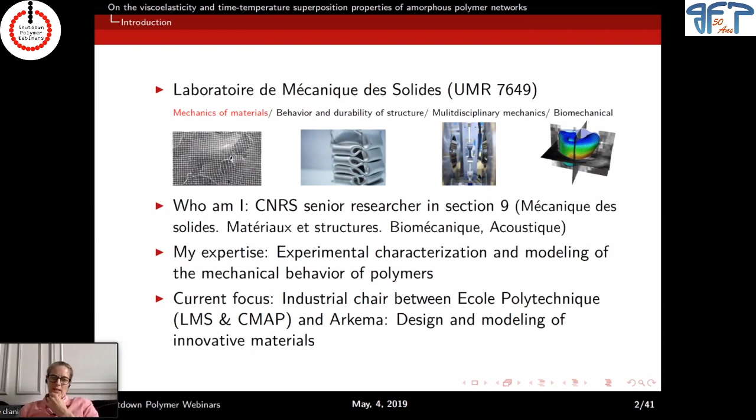I'm going to talk about a topic that we studied with my colleagues for approximately a decade. But my current focus is on an industrial chair between École Polytechnique, so our lab, and CMAP, the Applied Mathematics Department lab, and Arkema, and we are interested in design and modeling of innovative materials. I'm leading this chair for École Polytechnique.

So when we started looking at linear viscoelasticity and time temperature superposition of polymers, we were interested in modeling the shape memory behavior of polymers, more precisely of amorphous networks. We thought this property would probably be linked between the viscoelasticity and the time temperature superposition. So we looked at that, and we looked into the characterization at small strain, infinitesimal strain. Then we looked at how that extends to finite strain.

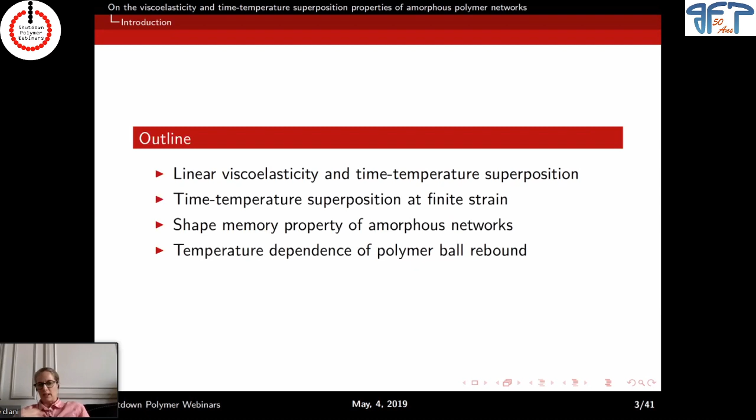And once we've characterized that, we look at how this helps predict the shape memory property of amorphous networks, and can also be useful for other applications like the rebound of polymer balls, like bouncing balls.

Okay, linear viscoelasticity. As I said, we are interested in writing constitutive equations. Basically, this defines the relationship between stress and strain and other internal variables, which can be, for example, plastic deformation, viscoelastic deformation, damage. Here we're going to focus on isotropic materials, basically materials with the same response with no privileged direction.

So the same response, whatever the direction of loading. And those materials can be completely described by two moduli. For example, shear and bulk moduli, but it can be also Young's modulus and Poisson ratio, or Lamé constants.

And viscoelasticity is basically a time-dependent behavior. So the stress is not only dependent on the state of strain, but it's dependent on how you reach this state of strain. The whole history of loading is going to affect the stress at time t, okay?

And in linear viscoelasticity, that means you can define the stress-strain relationship as such, with G of time, the relaxation modulus. And the goal is to define this function.

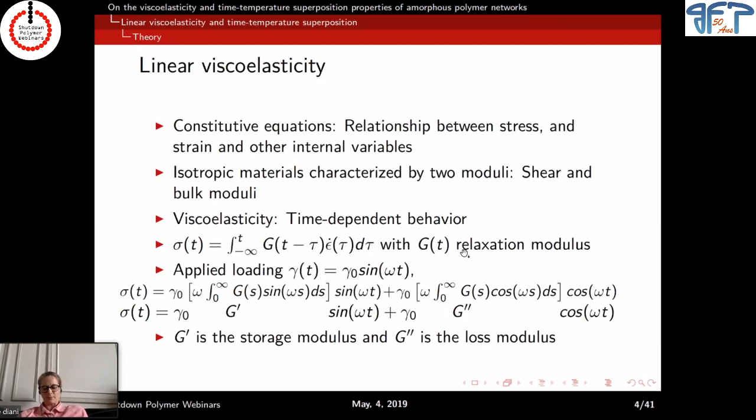Okay, from an experimental point of view, if you apply a sinusoidal shear, for example, if the material behaves as linear, what you get in terms of stress is a sinusoidal response, like here. And so if you plot the stress as a function of strain, you'll get a nice ellipse.

G prime and G double prime are calculated using fast Fourier transform, but you can also define G prime very simply: it's stress when the strain is maximum over the maximum strain. G double prime is related to the energy loss during a full cycle, so the hysteresis on this ellipse.

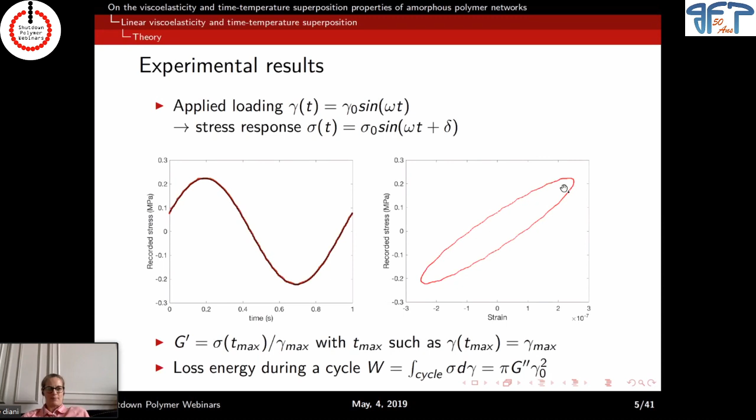When you're dealing with nonlinear response of a polymer network, you apply the sinusoidal strain and you won't get a sinusoidal response, such as here for a rubber material at large strain. If you plot stress in terms of strain, since I'm in a rubbery state here, I don't have hysteresis, but I don't have an ellipse either.

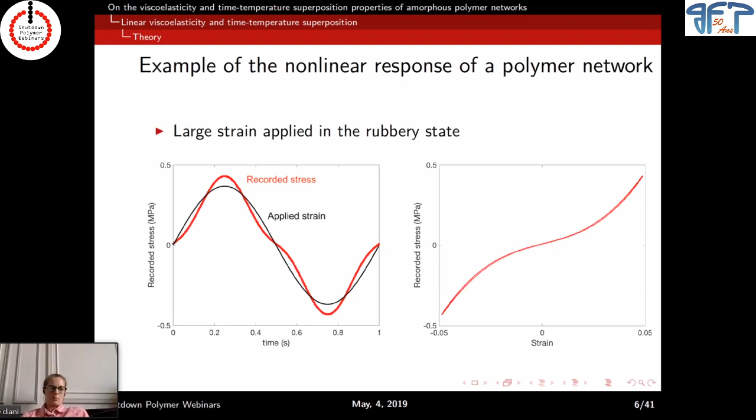Okay, so for the moment, I'm just interested in linear response. So I apply a sinusoidal strain, and I get a sinusoidal stress.

The polymerization and the cross-linking happen at the same time, so we don't really control what we get, but what's nice is that in terms of mechanical properties, we are capable of making simple materials that are reproducible.

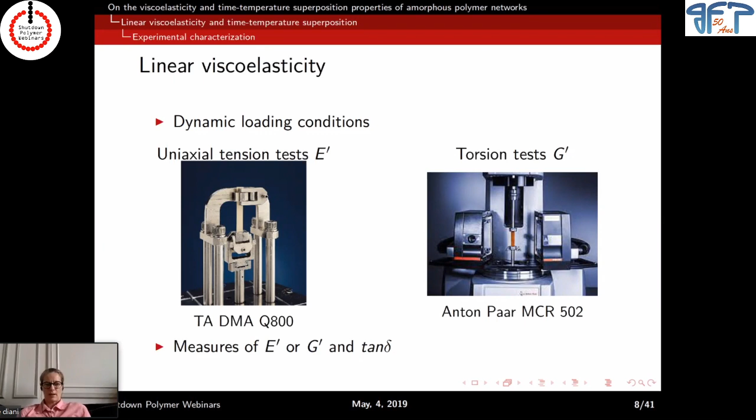Okay, so the first question I asked myself, because I was at the time at the PIMM, we had two types of machine helping characterize the linear viscoelasticity. So the first question was, if I apply uniaxial tension DMA or torsion DMA, would I get the same result? I had access to a TA DMA Q800 and a rheometer from Anton Paar to apply torsion and get access to G prime and G double prime. So first for the uniaxial tension test.

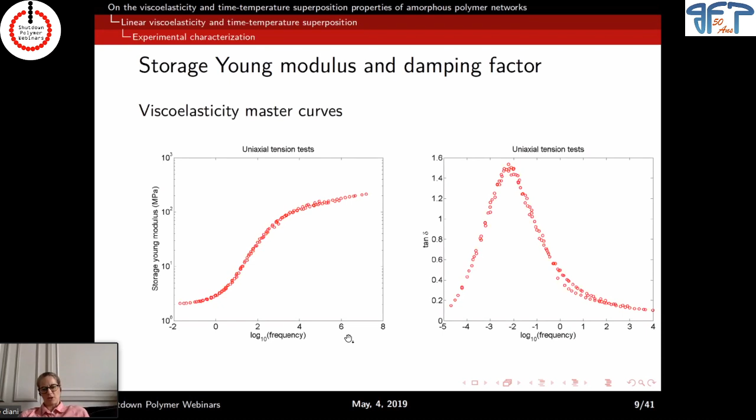The idea is that we want to build the viscoelastic master curve. Obviously, it's impossible to apply such a range of frequency, so we apply frequency sweeps from 10⁻² to 10 Hertz at given temperatures, for the same small amplitude, small enough so we have a linear response of the material. We get storage modulus as a function of frequency in log scale, and tangent delta in terms of the log of frequency.

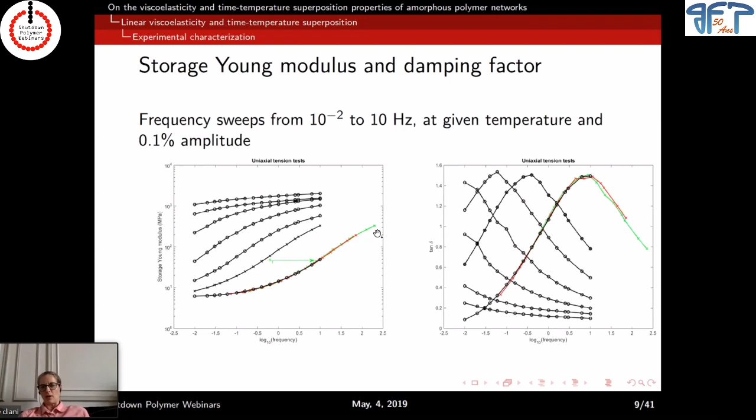We're going to build the master curve by applying the time temperature superposition. Choosing a reference temperature, the higher temperature, we're going to shift the curves one by one, and that's going to give us access to the shift factor for the reference temperature, and we're going to be able to build the master curve like that.

Okay, so that's classic, and that gives us access to some shift factors and the material's viscoelasticity. If I look at torsion test, it's a little bit more complex.

First, we're dealing here with solid rectangular samples, and we notice that if we have different geometries - here length 46mm and 5 millimeter width, so something a bit more slender than another more rectangular sample - and we do a temperature sweep, we get a very different response, even though we had a temperature sweep of 1 degree per minute.

Which is quite a small temperature ramp. So we noticed that according to the sample geometry - the thickness of the sample was 1 millimeter - we get different responses. So those temperature sweeps are nice to get a quick qualitative idea of the result, but will never give you quantitative data to characterize the viscoelasticity.

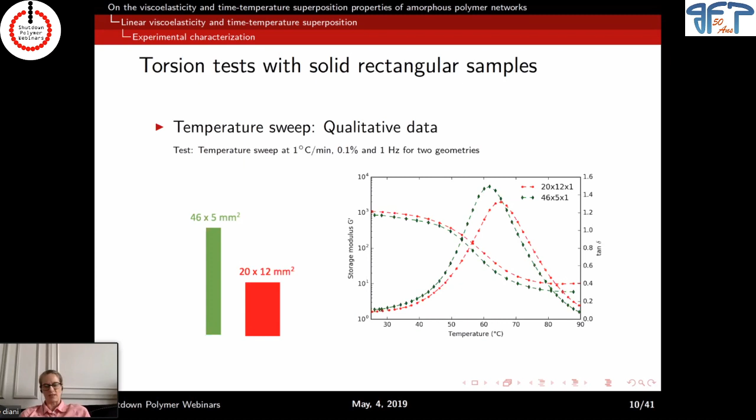If we do frequency sweeps, measuring at different temperatures but equilibrating the temperature before doing the measurements, we get the same tangent delta, but we don't get the same storage modulus. Why? Because actually, to get G prime and G double prime for a rectangular sample in torsion, we use the Saint-Venant approximation, and when you do that, you assume your sample is long with no disturbance from the grips that constrain the lateral displacement of your sample.

So we did finite element simulations to understand this difference, and actually you can see that the grip prevents homogeneous deformation in the smaller sample. So if you want a good quantitative result, even during a frequency sweep with this test, you need slender specimens - as long as you can and as thin as you can. But obviously, the small thermal chamber can be problematic from time to time.

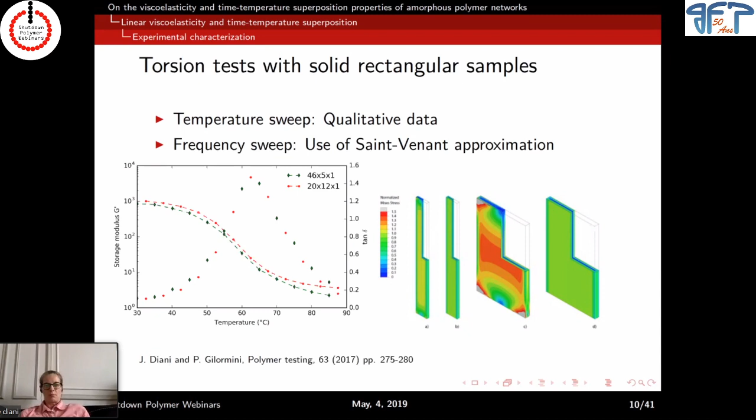Okay, so now that we know that, we're careful, and so we use long, thin samples. And we did the frequency sweeps from 10⁻² to 10 Hertz, at a given temperature, small amplitude of strain.

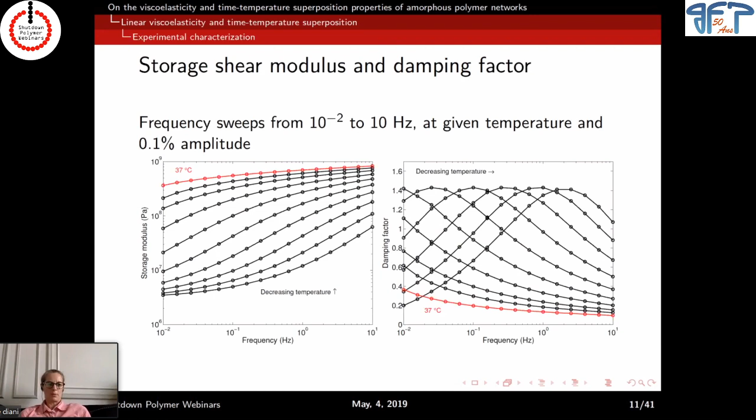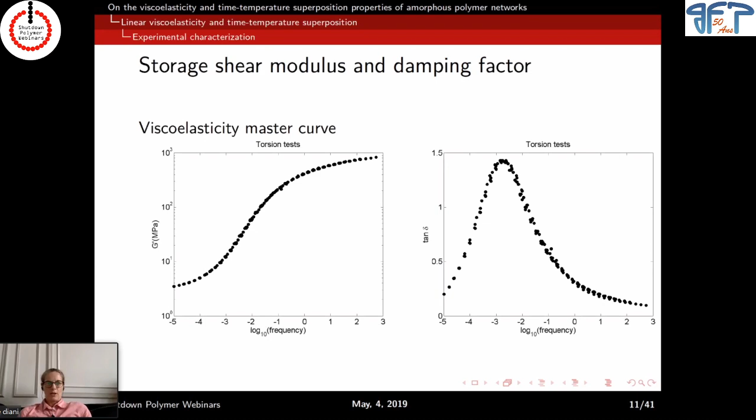And we build the master curve for G prime and tangent delta, as we did for E prime and tangent delta. So first thing, if we look at the shift factor for both tests, we can see that for building the master curve at the same reference temperature, we have equivalent shift factors.

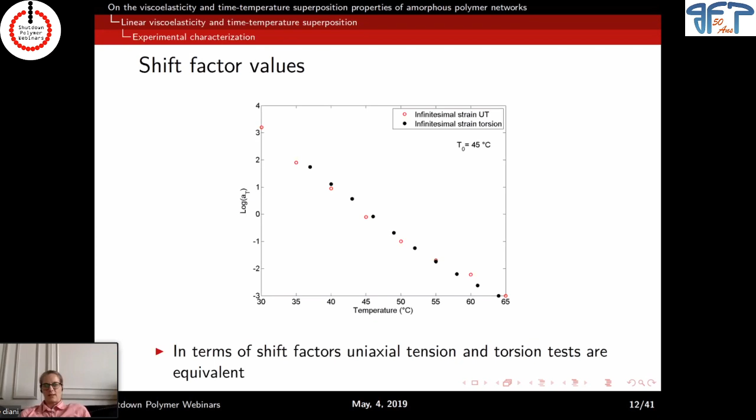So both tests give us the same shift factors. If we want to compare G prime and G double prime for both tests, we can use Hashin correspondence principle, which basically says that all the relationships that exist in elasticity still apply in linear viscoelasticity if you replace the elastic values by their complex values.

These are defined as, for example, G star is going to be G prime plus i G double prime. So doing that, we can use the value of E star that we measured.

We need to make an assumption for the bulk modulus because there are very few apparatus that give you access to the viscoelasticity of the bulk modulus. We thought, okay, we're going to assume it as elastic because, although it changes over temperature so it's viscoelastic, the order of magnitude is 2 to 3, while Young's modulus or shear modulus change over 3 orders of magnitude. So we assume it constant and calculate G prime and G double prime with the measured value obtained in uniaxial tension, and compare it to the G prime and G double prime measured during torsion test.

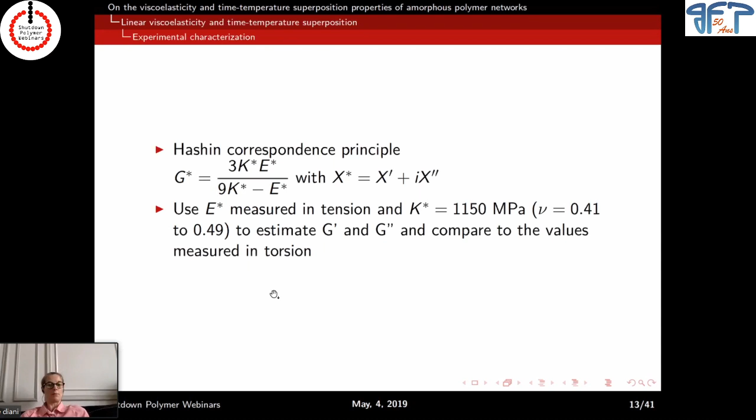When we do that, we can see that we have very nice superposition. So what does it mean? That means those tests are completely equivalent. You can characterize the linear viscoelasticity in uniaxial tension or in torsion or shearing.

And if you wanted to have access, for example, to the Poisson ratio or bulk modulus viscoelasticity by running both experiments, your experiments are not sensitive enough to do that. So you won't have access to the viscoelasticity of incompressibility.

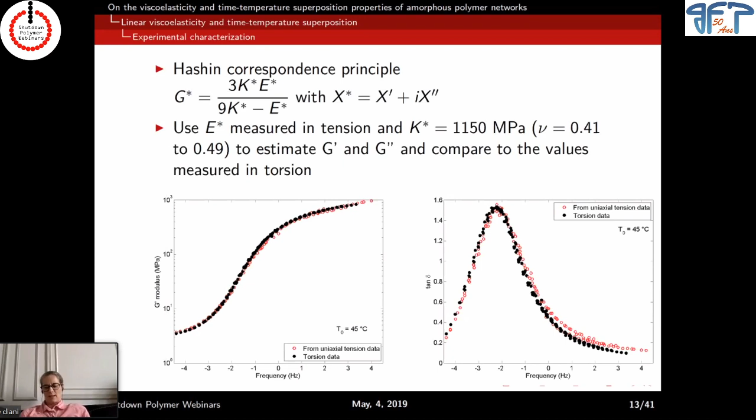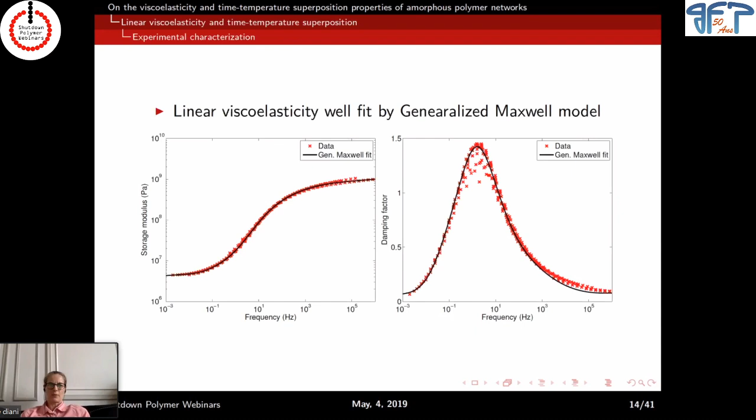Okay, so now that we know how to characterize well the linear viscoelasticity of our material, we can fit it by a simple model, generalized Maxwell model, that works really well for polymers in general. And here it's fit with 20 relaxation times. So this model is basically Maxwell elements in parallel, with a spring for the long-term elasticity, because we have a network here, so our polymer doesn't flow.

And the relaxation function, relaxation shear modulus, is defined like that, with GE being your elasticity at long term, and GI and tau i, a number of couples depending on the number of Maxwell branches you want to take into account.

Usually for polymers, amorphous networks, about 20 is fine, but if you have copolymers, sometimes you need like 40. It can be much more. It's not a problem since you have a sum, it's not really costly.

So basically, we measured G prime and G double prime as a function of the angular frequency, and so we are able to calculate GI and tau i. But it's an ill-posed problem, though there are ways in the literature to solve that correctly, as you've just seen.

And so once you have this function, you can calculate the stress response of your material for any loading history at the given temperature, your reference temperature where you build your master curve. And then with the shift factor, you have access to the linear viscoelastic behavior at any temperature.

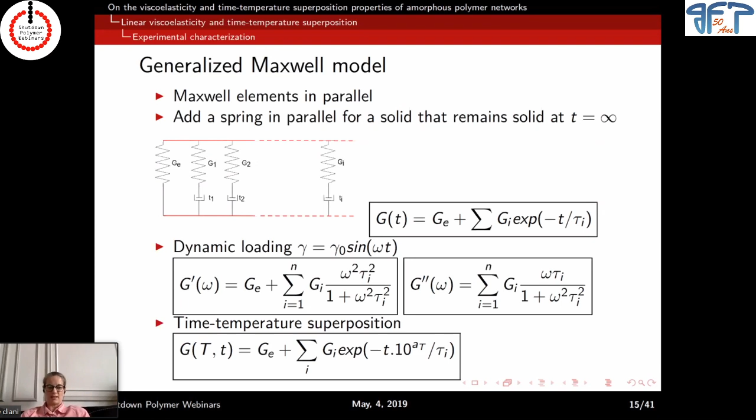So now, since we want to deal with shape memory properties, it's not only small infinitesimal strain, sometimes we have large transformation or large deformation. We wondered, okay, all those shift factors that are very useful for us because they make the link between temperature and time, do they apply for finite strain?

If it does apply, what we should get is being able to define the reduced time for any temperature, making the link between the reduced time at a given temperature T0, and the time at any temperature. So basically, if you apply a stress strain at a given strain rate epsilon dot at temperature T, you should have the same response as the material at temperature T0 solicited at the strain rate depending on T0.

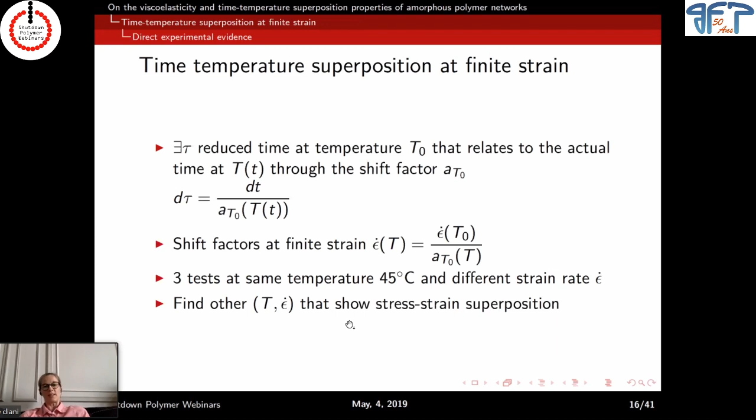So to try that, we set 3 uniaxial tension tests at large strain, temperature 45 degrees, and different strain rates. We measured the response and tried to find other couples of temperature and strain rate that show the same stress strain response, so superimposition between the stress strain responses.

So now that we observe time temperature superposition at finite strain, we compared the shift factor measured with the linear DMA test, and the shift factor measured at finite strain with the stress strain response in uniaxial tension. And as you can see, they are completely equivalent.

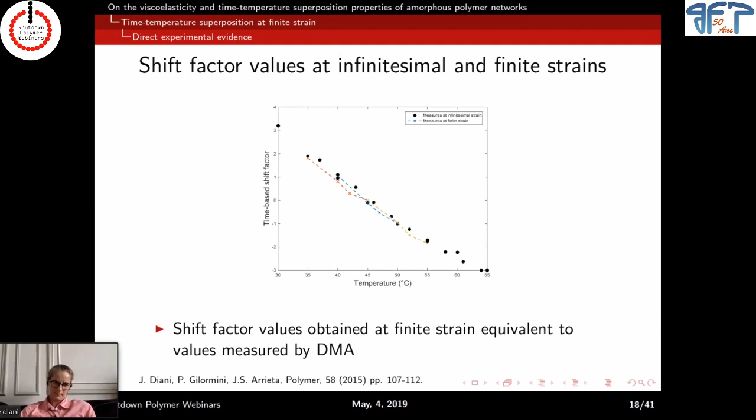Okay, so what's nice now is that I can define simply a constitutive equation at finite strain. So visco-hyperelastic behavior.

We have measured in linear viscoelasticity the time temperature shift factor for the time temperature superposition, and we have measured the viscoelasticity in terms of the relaxation time and the modulus associated to that. We can transpose that directly to large deformation using either a Simo model or a thermodynamic model, such as proposed by Reese and Govindjee.

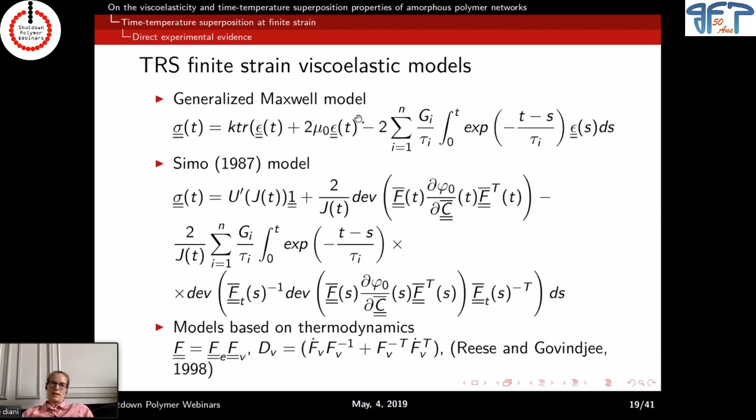So I won't go through all these equations, but it's basically writing the generalized Maxwell model in finite strain. Okay, and we're going to apply that to the shape memory property of our amorphous network.

And so the property, the shape memory property for amorphous network, is very simple. You go at high temperature, you're in the rubbery state. In the rubbery state, you can apply large deformations that are reversible.

So by maintaining the shape and cooling down the material, the material is in the glassy state, the chain mobility is very low, and so the material will keep its shape as long as we don't expose it to high temperature. If we put it at high temperature, it's going to recover the initial shape.

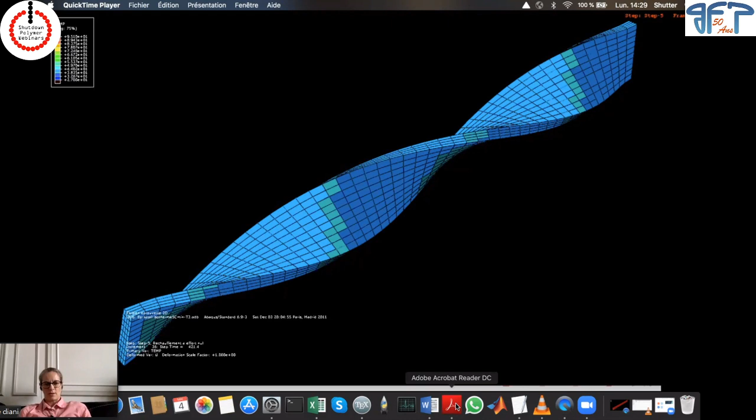So that's the principle. Basically, you need to have elasticity at high temperature, being able to apply large deformations that are recoverable. You apply at high temperature the temporary shape, cool it down while maintaining the shape. When you release the stress, the shape remains, and then just by heating, you'll recover your initial shape.

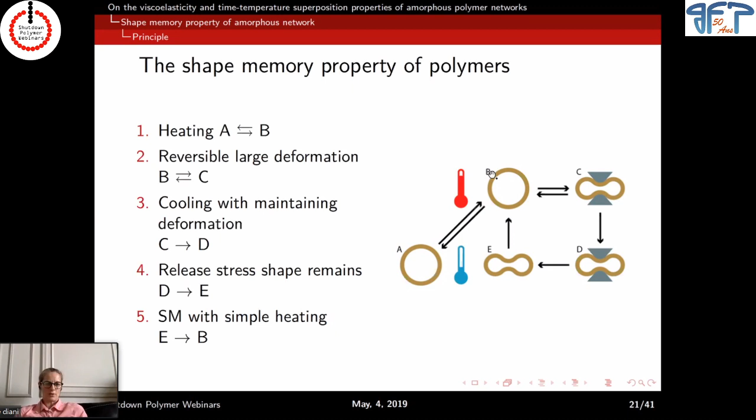When we started working on that, in the literature there were basically two types of tests, uniaxial tension tests, which are nice for one reason, that you can apply large deformation, but also because you can look at the shape recovery, looking at, while you're raising the temperature, how it recovers the strain.

But also what you can do is look at this, what we call abusively stress recovery, basically you maintain the applied strain and raise the temperature and look at how the stress evolves with the temperature.

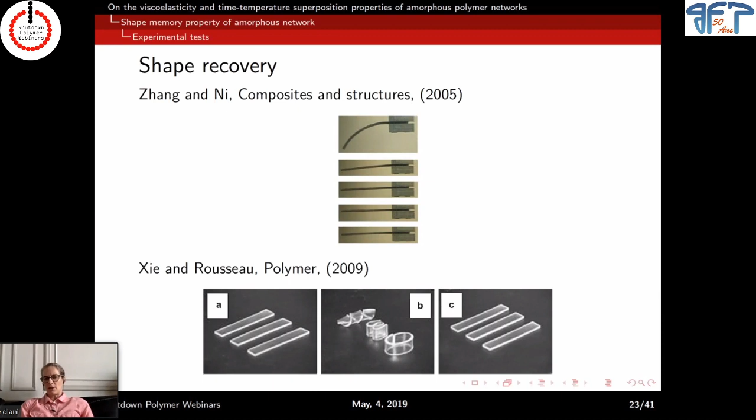And there was change of shape, but that just looks at whether we have a complete recovery or not. So no quantitative following of the shape recovery. That doesn't help you look at the kinetics of the recovery and how you can predict that.

So we decided to build a device, a torsion device, that would help us look at change of shape with large transformation, rather small deformation, but large transformation.

And quantitatively, while we raise the temperature, look at the recovery in terms of temperature. So the idea was to have a slender rectangular sample, raise the temperature, apply a 360-degree torsion, cool it down, and then look at its recovery while heating the sample.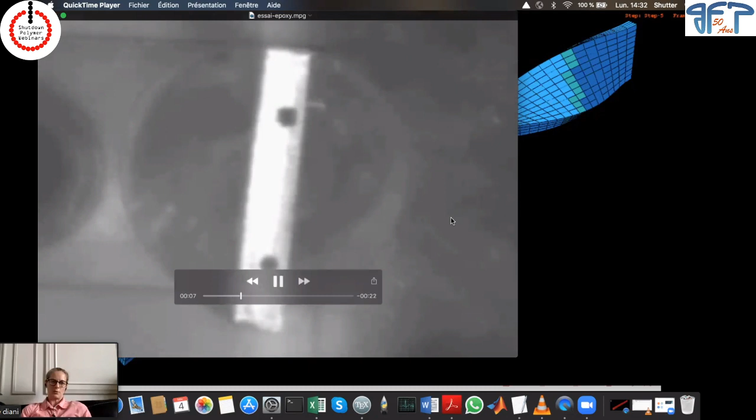...look at, while we were measuring the temperature change over time, the recovery of the sample in terms of angle of recovery with the temperature.

Okay, so the torsion: we heated the sample above the glass transition, applied a 360-degree torsion at high temperature, cooled it down, looked at the shape fixity, meaning how much the material recovered after we release the stress at low temperature, and it was excellent because applying 360 degrees, we ended up with 359 degrees of rotation.

And then we record the torsion angle recovery, and the temperature history while heating the sample.

So that gave us not only good recovery or bad recovery, but the kinetics of the recovery. Here you see the recovery according to the ramp of temperature heating from 1.1 to 5 to 6 degrees per minute. You can see how the recovery is complete, but also you can see the kinetic impact of the temperature rate.

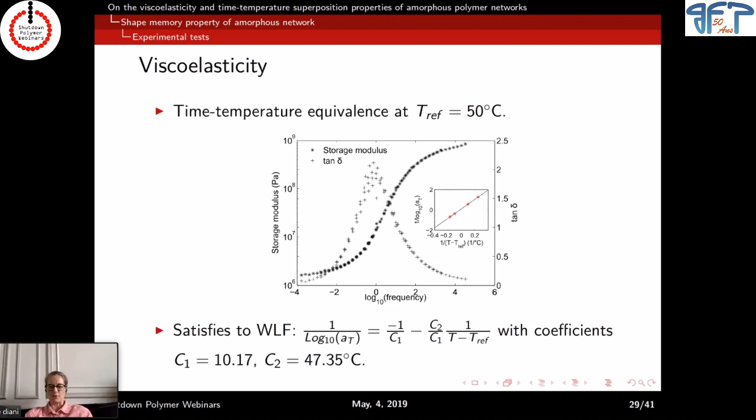With the viscoelastic measurements, we fit a generalized Maxwell model on G prime, validated it on tangent delta, and looked at the viscoelastic spectrum.

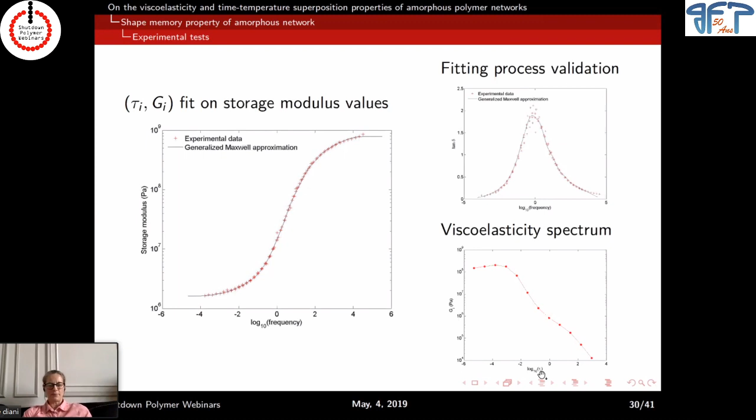The GI is a function of the relaxation time. We needed additional data because we do 3D simulation, so we needed a bulk modulus, and we gave a value that was reasonable to get something that was okay in the glassy state and in the rubbery state.

Also, in torsion we don't need it that much, but later in uniaxial tension we'll need a linear thermal expansion coefficient.

We had two approaches. First, we measured in the glassy state and in the rubbery state. But then if we had to do the whole history and have good stress in uniaxial tension, we needed to measure it and give the whole history as a function of the temperature rate, because the linear expansion is also depending on the temperature rate.

The modeling was done with the finite element code Abaqus, using the NLGEOM option for large deformation. The generalized Maxwell model and the WLF equations are available in the code for finite strain.

The reference elastic behavior, the hyperelastic behavior at high temperature, was chosen as Neo-Hookean with elastic modulus of 1.6, which we measured experimentally.

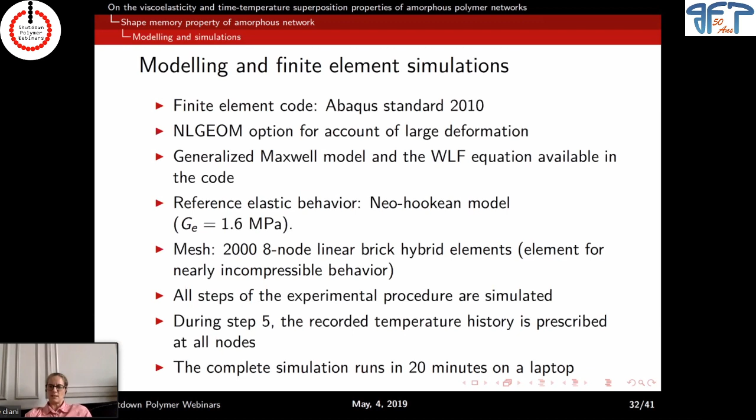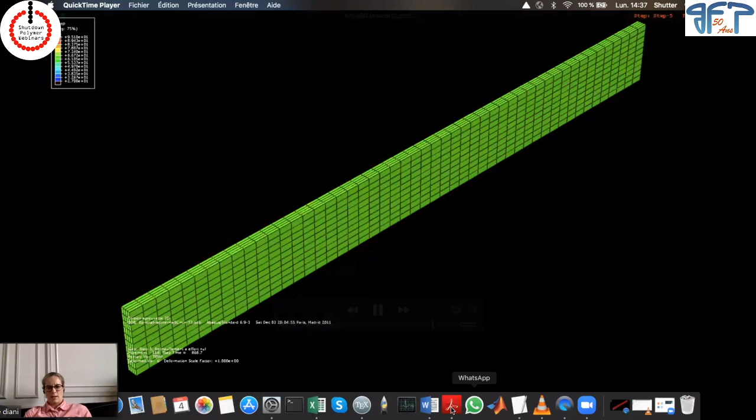That gives something like that. Look at our sample. We have, according to the temperature, how the material recovers.

If we compare the model and the experiments, you can see that we can predict the kinetics of the shape recovery. Basically, what we just proved is something that probably a lot of people from the physics of polymers would say is obvious: that the shape memory property of amorphous polymer networks is basically a signature of intrinsic properties of this material, which are the viscoelasticity and the time temperature superposition, and nothing else. It's one thing to understand it, another thing to prove it, and to be able to give constitutive equations that would help predict the behavior of this material.

We also looked at a large strain uniaxial tension test, because it gave us a little bit more versatility. We could look at large strains of 20 and 50%, and we could look at the temperature at which we applied the strain.

65 degrees was basically for us the rubbery state, 45 was the beginning of the onset of viscoelasticity. We looked at the impact of the heating ramp.

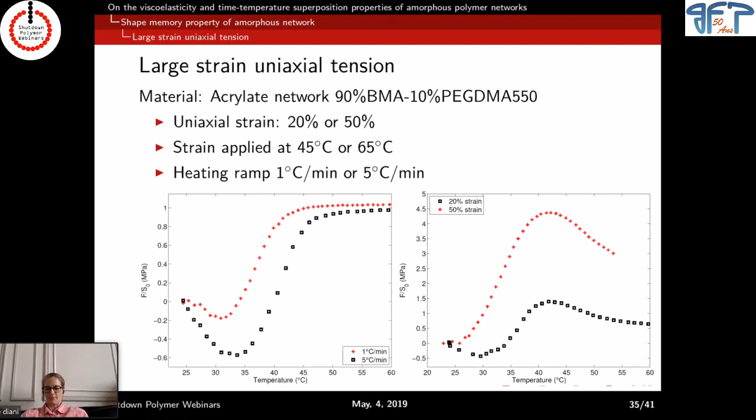With the same model, you can see that we have a very good prediction of the shape recovery, whatever the temperature rate, whatever the applied maximum strain.

We were also able to show that we get very good stress recovery, so the constitutive equations are robust enough not only to look at how the shape recovers, but also how the force evolves with temperature.

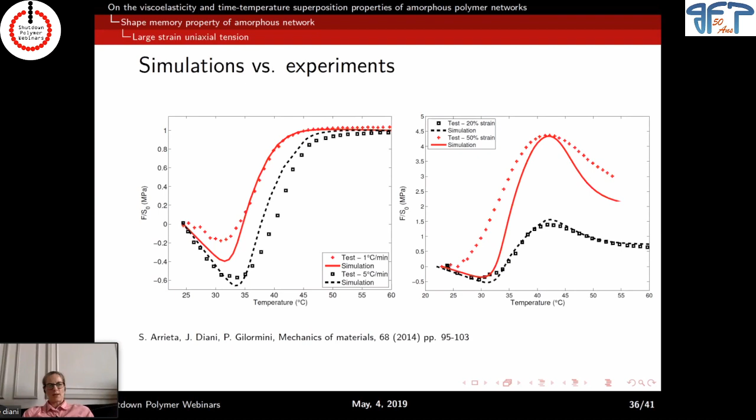After that, we thought about what else could we do exhibiting the linear viscoelasticity properties and the time temperature superposition in an amorphous network. We had a master's student who came to see us in first year, and we decided to go for a fun project: let's make some rubber-like polymer balls.

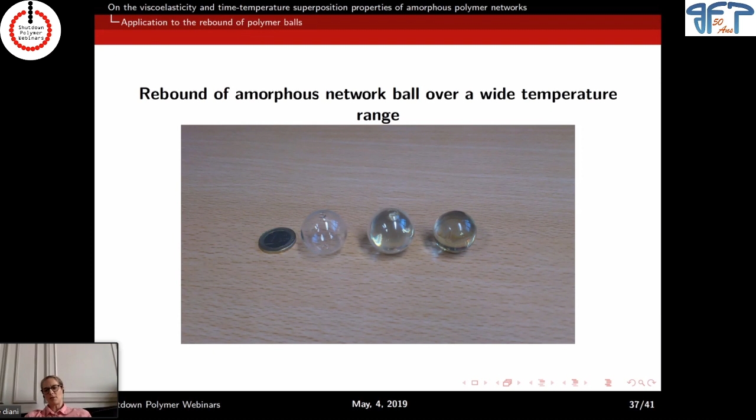We look at the rebound of these balls according to the temperature. Here is the experiment that the student ran at different temperatures. We're going to look at the rebound of the polymer ball. For curing our balls, we had a pump to drop the ball straight onto a granite slab, and we put a piezo resistive capture to record the duration of impact on the slab.

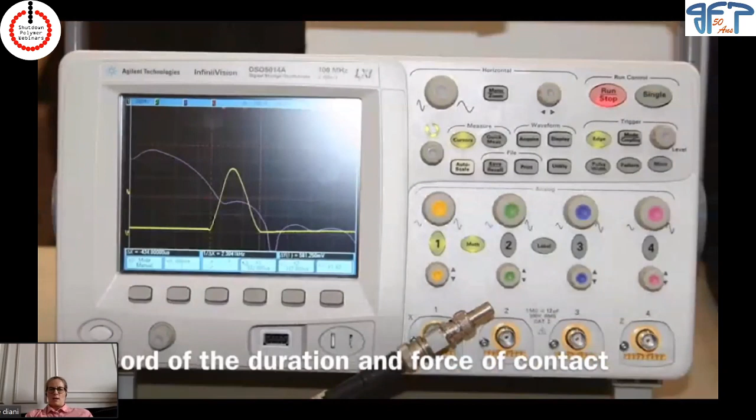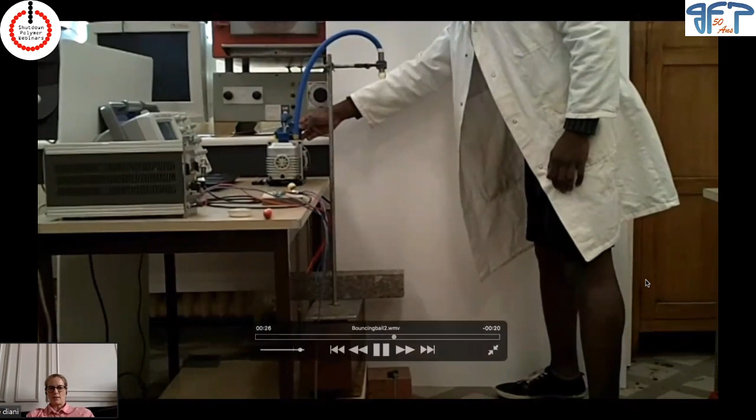Looking also at the force of contact: at room temperature, the material is in glassy state, and you're going to see it coat the ball here, so it's a really good rebound. At 88 degrees, we are within the transition, and the rebound is almost nonexistent, very small. At the high temperature in the rubbery state, we had very good rebound.

We look at the coefficient of restitution, which is basically defined by the height of the rebound. If you have an elastic material you should get 1. Well, we know in polymers there's no perfect elasticity, but unfortunately we didn't verify with a metal bead that this is not due to the experimental setup, and whether we would really get 1 for an elastic material.

What's interesting is that you can see how with temperature the rebound is dramatically dropping. And that has an application, actually. If you think about squash players warming up their ball before playing, it means basically they're around here, or they're in there, and by warming up their balls they're going to go closer to the rubbery state and have a better bounce.

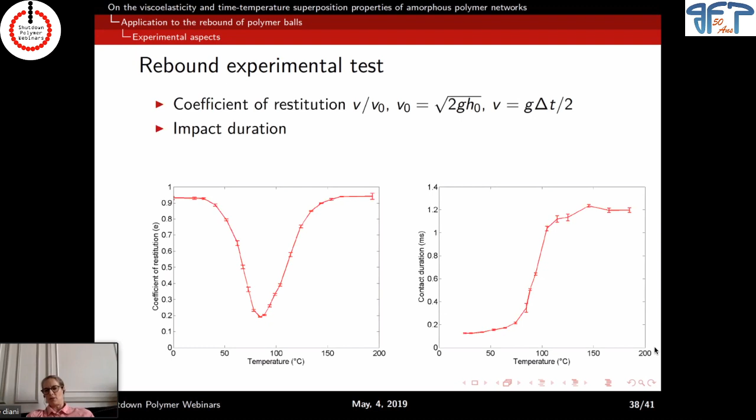So here I'm looking at the impact duration according to the temperature. Once again, we characterize by linear viscoelasticity. Actually, this is the same material, the same acrylate, so we have the linear viscoelastic behavior, the time temperature superposition, the same constitutive equation, and we run dynamic explicit calculation, finite element with Abaqus again, and look at the bounds.

But if you look also at the duration of impact versus temperature, we have quite satisfactory comparison. So we were able to say, okay, knowing the linear viscoelasticity and the time temperature superposition of our polymer, we are capable of predicting the rebound of our balls.

I'm going to have a last slide to thank my co-authors. We worked a lot with Pierre Gilormini on the modeling and all this viscoelastic problem, and Ingrid Rousseau, an engineer at General Motors, who was interested in shape memory polymers, with whom we worked on shape memory polymers. And the students: we had two master students and a PhD student financed by an ANR grant I got, I think in 2010 or thereabouts, with financial support from both ANR and General Motors. Thanks a lot for your attention, and I'm open to questions.

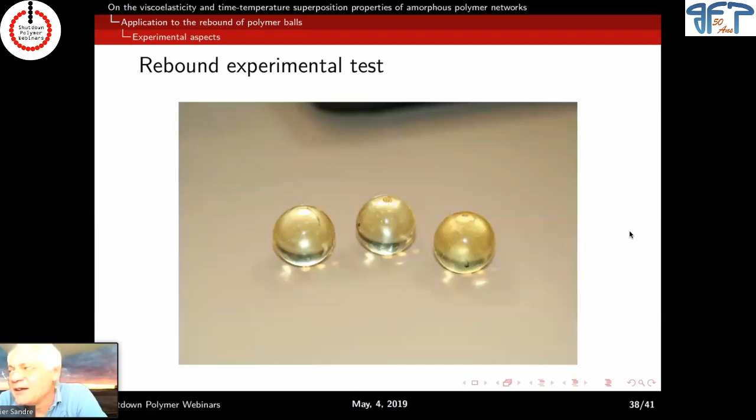On some of your slides I could see the Poisson modulus mentioned, but I don't think you commented on how you estimate, measure, or calculate this for the two states of your polymer.

Okay, so that's very basic. You just do a uniaxial tension test, for example in the glassy state at cold temperature, and by looking at the ratio of the transverse strain over the longitudinal strain, you get the Poisson ratio. What's very difficult is in the rubbery state: we looked at the two free faces of our sample and looked at the change of volume upon uniaxial tension.

And you can see that it's very close to 0, so the Poisson ratio is very close to 0.5. So the rubbers are incompressible, is it? They're quite incompressible, but they're never truly incompressible because it's far from it, the bulk modulus is more close to 3,000, which is not gigantic, right? But if you look at the change of volume when you do a uniaxial tension, it's close to 0. So that's why we say it's incompressible. But from a mechanical point of view, with a bulk modulus of 3,000, it's far from being incompressible.

But the difficult part of the Poisson ratio, and also the same for the bulk modulus, is to measure the viscoelasticity of these parameters, and it's very difficult. We know there are very few apparatus that can do it for the bulk modulus.

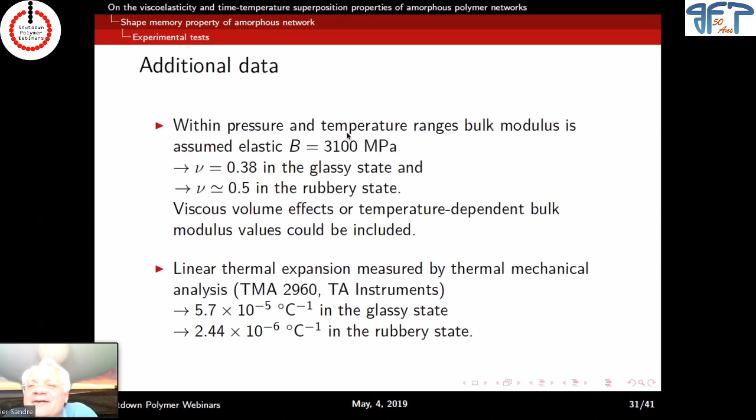Indra Parmar is asking what monomers and photoinitiator you were using to prepare the material.

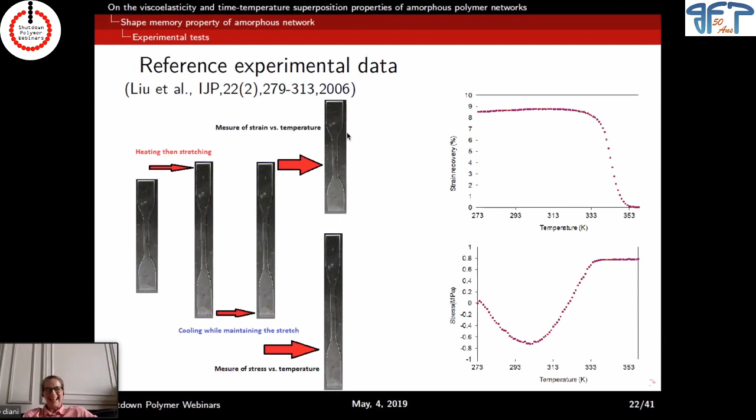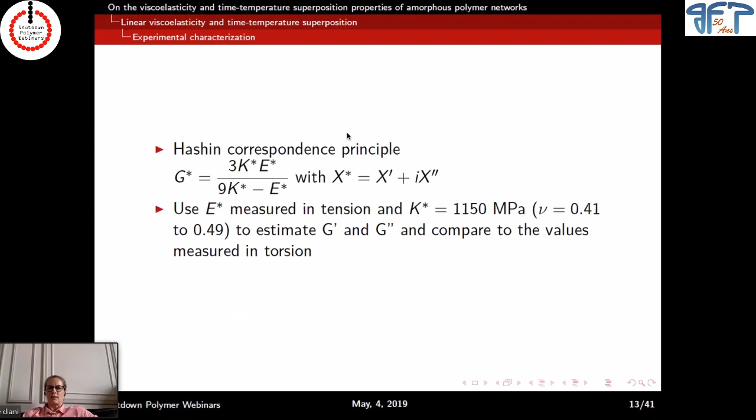You can show the slide again. Okay, so basically we are using for photoinitiator, it's DMPA - the name is so complex that I don't know the whole name, but it's DMPA. I was discussing with some chemists and they told me it's bad, it's an old thing, but for what we do it works fine. I mean, it's a dimethoxy phenyl or something. But in our paper it's the benzophenone type.

So for the monomer, yeah, the question is also: are you sure that you go until 100% curing in your case?

Okay, that's a good question, and I asked that to a chemist actually, especially for my beads - I was worried about my beads, and I said how do I know that it's good. Basically she told me, if it's solid, you're fine. The thing is, would I have a problem of post-curing? I don't think so, because what we do is reproduce always the same mechanical behavior. So we never had the problem of not cross-linking long enough, where from one batch to another we don't get the same mechanical behavior.

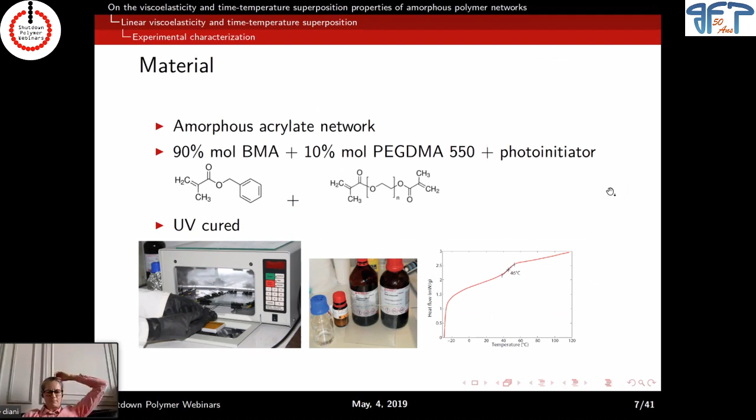Okay, I wish - just a question at the end of your talk. Maybe I'm sure I misunderstood something regarding the efficiency of the rebound of the ball, the efficiency versus temperature. It goes through a minimum around the Tg.

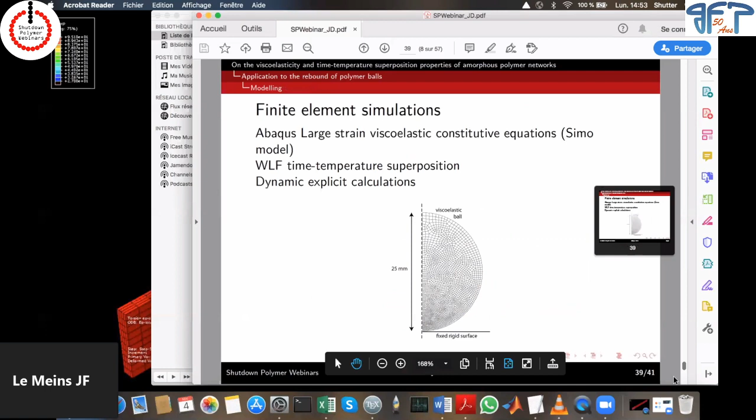I have missed something, but how do you control the temperature of the experiment? Oh, for the rebound, as you've seen, it's super fast, right? So what we do is we just warm our balls in a thermal chamber. We put them until the temperature of the balls is equilibrated, and then we run the test once for each ball.

Like, we have several balls, once for each ball. So we say, okay, during the 20 seconds or 10 seconds, the temperature is okay.

And did you study the inverse system, to make a hydrogel surface that would absorb totally the rebound of another ball, like a metal ball?

Oh well, recently we tried that, because with Arkema we had a study on foams, so we were interested in that. The problem is that you have to have a surface that is reproducible, and you need a surface that is really flat, and it wasn't our case, so we gave up a little bit on this.

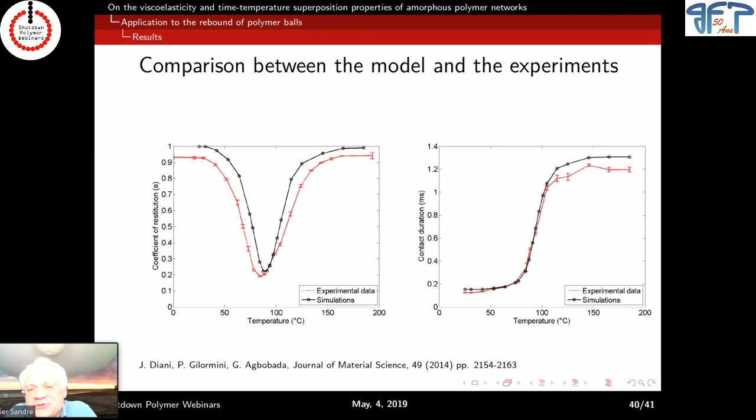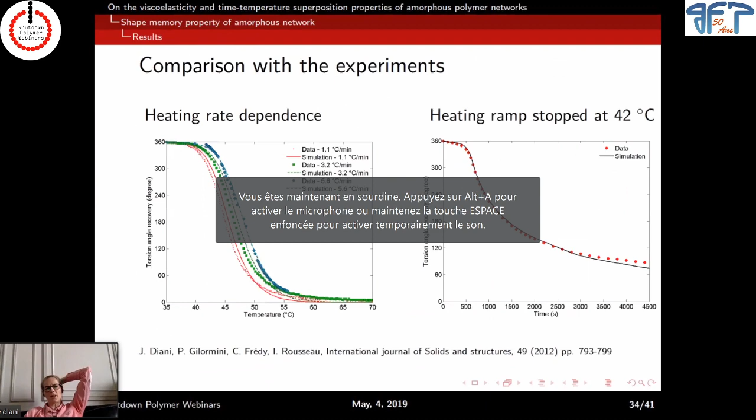Now I go back to the question by Fiona. She was asking if you tried different cross-link ratios, because you show us 10%, but is it a parameter you varied in your simulation? 10% is actually quite a lot, it's a tight network. So we tried different things, and even with molar mass, I think it depends on your cross-linker, but even like something we did recently with IPN, we were interested in the viscoelasticity of IPN, and so we had 2% molar mass.

So IPN is interpenetrated network, two types of polymers, with two acrylates, and so we had to do a loose network, right? And so we had like 2% molar mass. Works fine too. So we varied 10%.

I think it was about that. I also use only the crosslinker sometimes, like 100% of the crosslinker. You have the length of the chains is the length of your crosslinker. What's nice with the acrylate for us is that we were able to tailor the glass transition temperature, and so according to our need in terms of behavior and experimental setting, it's interesting that with something very simple we can change the glass transition easily.

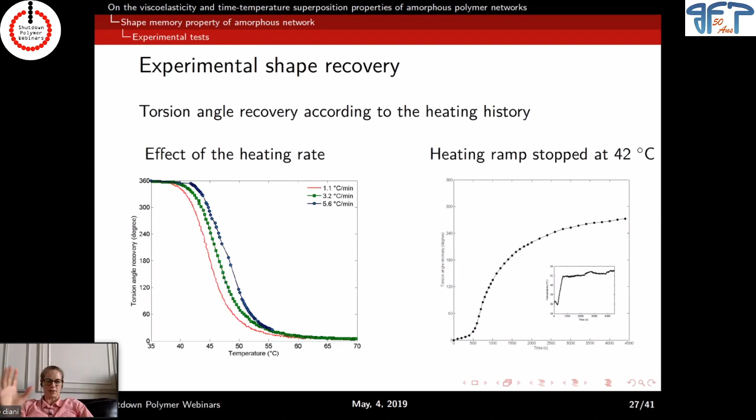We haven't done that. I've done it, but having this, I could apply it, for example, on my finite element model. Here I applied the same temperature on all the nodes. If now I just apply it on the surface and have a conductivity coefficient for how the temperature changes over time, I would be able to do that. There's no problem for that.

I have another one. Your model is quite general, I think, for amorphous elastomers, because it's based on the Maxwell linear response theory. But can you imagine making a model for a more complicated case if the elastomer also exhibits some semi-crystallinity? I think there are some shape memory elastomers based on polyurethanes or maybe polyesters, which also have a melting temperature. So you have the Tg and the melting temperature. Do you think it would be possible to make such a model also for those more complicated cases?

So I think there's two things that are different. Yeah, you're right, our model is really based on the glass transition temperature. If you look at TPEs used for shape memory property, usually if you have time-temperature superposition, I think it should work, no problem. When you look at crystalline material and look at the fusion and the property, it's another physics. So probably you need another model, another constitutive equation, because the physics is completely different, right?

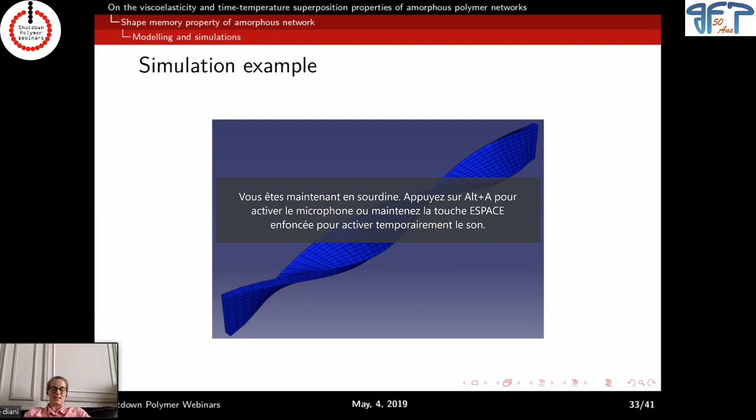No, it's more like you need to look at how the stress and strain are distributed in the sample. Basically the Saint-Venant approximation is really using some assumption on how the stress or strain are distributed within the sample. And if that's not true, applying Saint-Venant won't give you the right behavior.

The thing is, it's something you need to be careful with. For example, something I didn't mention is that the DMA Q800 doesn't give you access to the signal—the stress or strain signal, the sinusoidal signal. So you never know when you're in linear viscoelasticity or not. But anyway, it will always give you a value of E prime and E double prime, and sometimes those values don't look that off. You need to be really careful when you don't have the signals, because you don't really know if you're in linear viscoelasticity or not.

That's the first point. And for the torsion, from a mechanical point of view—what we noted in the paper—I had different samples, and I did some simulations with the same properties but different lengths of sample, and I wasn't getting the same G prime and G double prime. I couldn't understand it since it's just simulation, and that's where we noticed that we need to be careful of the fact that the tight grips are giving a non-homogeneous state of stress in the samples.